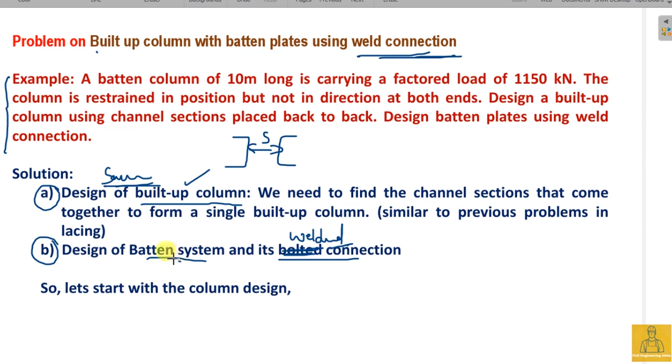This first step is going to be the same, so I am not going to repeat that. We are directly going to the batten system. Let us start. The remaining part is the same. The spacing between these two channel sections is found to be 218.4 mm. This is the minimum spacing you need to provide. We have rounded this value to 220 mm.

Now let us go with the batten system. Spacing of battens is the same as the previous case. According to clause 7.7.3, lambda of the individual portion should be less than 0.7 times lambda of the built-up section. This built-up section lambda is already found from the previous slides as 80.53.

Lambda of this portion can be written as length divided by minimum radius of gyration RYY, so it should be less than 0.7 times 80.53. So C should be less than 0.7 times 80.53 into RYY. What is RYY? It is already calculated from the code book as 28.3. On substitution, C should be less than 1595.3 mm.

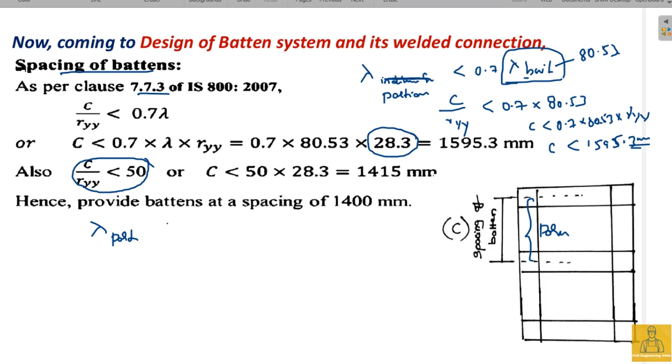We also have another condition that C by RYY, that is lambda of this portion, should be less than 50. So C should be less than 50 into RYY, which is less than 50 into 28.3. So C should be less than 1415 mm... I am taking 1400 mm as the spacing between these two battens here.

Now let us go with the size of the end battens. In the previous video we saw bolted connections there, using bolts to connect the batten plates, with an effective distance and edge distance E and E. So we wrote D equals small d plus 2E for bolts, but capital D equals small d in case of weld, since we do not have anything extra here. This total value is D. We do not have bolts, right? This is the welded connection.

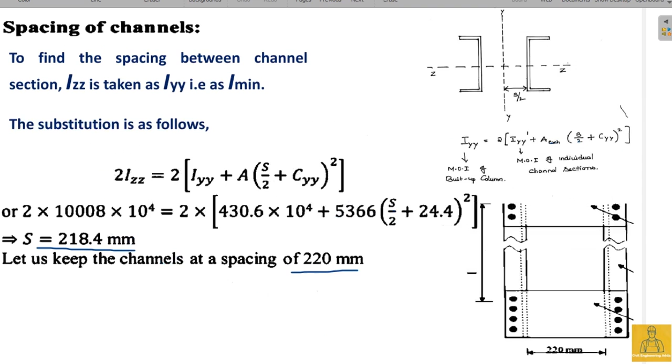So overall depth is given by S plus 2 CYY, which you can find out as 270. Required thickness of the batten is 1 by 50th of spacing. Spacing we already found from the previous case: S equals 220, the spacing between the channel sections.

Of course, you may get confused with this spacing of the battens—do not do that, be careful with that. Next, it comes to around 4.4 mm, which you can round off to 6 or 8 mm.

The length of the batten is S plus 2 times the lapping. This here is the lapping length. So what we are going to do is: length of the batten should be S plus 2 times lapping. This is S, and this is S, so S plus 2 times lapping gives you the length of the batten.

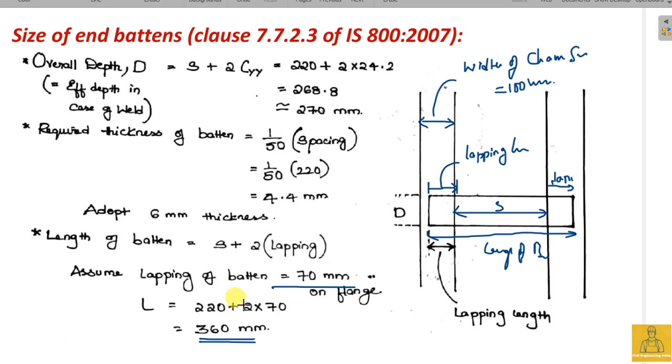Lapping can be assumed based on the width of the channel section; we have assumed it as 70. This is the width of the channel section, which equals 100 mm in this case, ISMC 350. Therefore L equals 360. So you know the depth, thickness and length—this is for end battens.

What happens for intermediate battens? You can check that the minimum lapping should be 4 times T, the thickness of the plate, that is 24 mm. Since 70 is provided, we have provided more than the minimum lapping required.

So therefore no problem with that. Okay.

Intermediate battens again: overall depth will be equal to 3/4 of S plus 2 times CYY. It is 201.6, you can round it off. So D should be greater than 2 times of B, meaning it should be more than 200. So 201.6 mm is enough, but let us take more than this. Let us round this off to 220 mm. So overall depth is safe and provide D as 220.

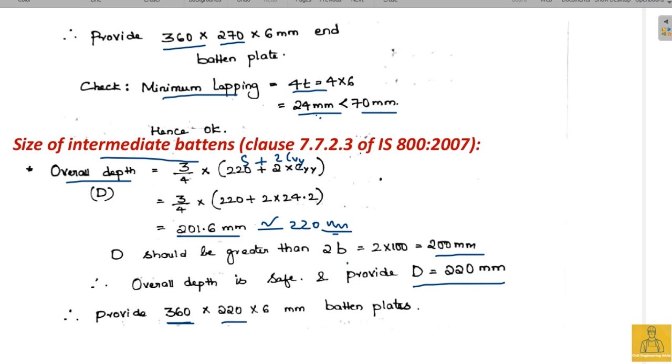So these end battens have a length of 360. This end batten has 360 length and intermediate also has 360 length, but the depth is 270 for end, and for intermediate it is 220. Thickness again is 6 mm.

Next, transverse design forces are again same. The transverse shear force is 2.5% of axial load, that is 28750. Longitudinal shear VL is going to be VC by NS. The spacing of battens C is equal to 1400 mm, which we calculated from the previous. Number of parallel planes of batten is 2.

Minimum transverse distance between the centroid of the bolt or weld group is S plus 2 times of G, which is equal to 320 in this particular case.

Longitudinal shear force is going to be this much. So if this is the batten, this is the VL shear force. Now this longitudinal shear force is giving rise to moment, and that moment due to longitudinal shear force is VC by 2N, which is 10.06 into 10 to the power of 6 Newton mm.

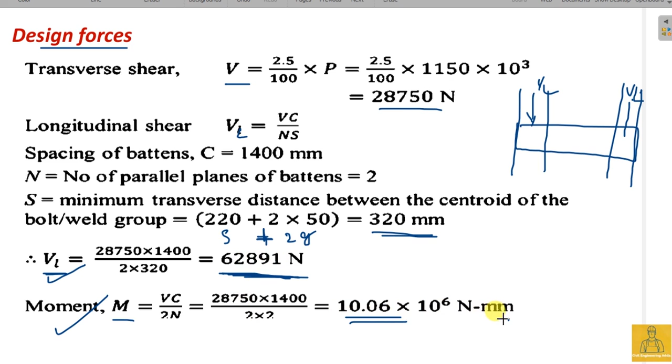Now what we are seeing is there is a shear force and there is a bending moment. Therefore there are stresses due to shear force and moment. Because of the longitudinal shear force of 62 kilonewton and moment of 10.06 into 10 to the power of 6 Newton mm, there are two stresses due to shear force and bending, and shear stress is given by shear force divided by cross sectional area of batten. So shear force divided by area of batten gives that, and bending stress is nothing but M by Z, which is 138 MPa, and you have to check whether they are within the limits or not.

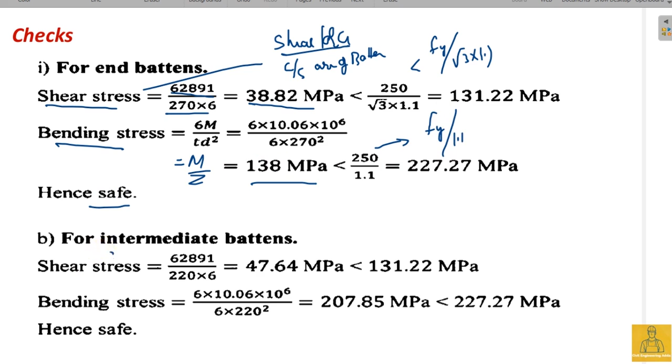The shear stress should be less than Fy by root over 3 into 1.1, factor of safety 1.1, and bending stress should be less than Fy by 1.1. It is within the limits, therefore it is safe. Similarly for intermediate battens also check that.

So now coming to the welded connection. When we are talking about the welded connection, the important thing is what should be the size of the weld and what is the throat thickness of the weld. That's it, right? So you have to find out what is the throat thickness. And remember, when you are putting this batten plate over this channel section in this way, you have to weld on all the four sides. See, 1, 2, 3, and other side, back side 4.

So now, in order to calculate what is the thickness of this weld required, minimum thickness, you just need to find out what is the moment of inertia about ZZ axis. See, this is an axis and this is an axis, this is ZZ and this is YY.

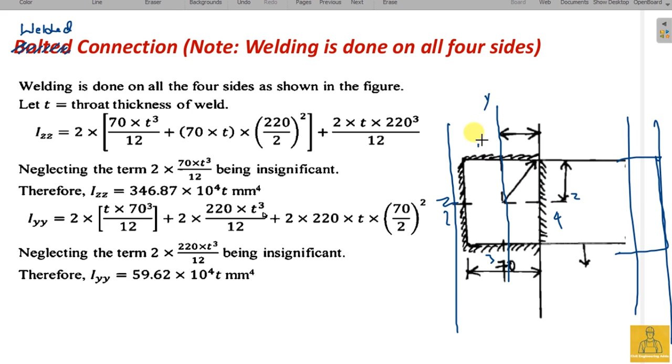So now let us come to the welded connection. When this batten is placed over the build-up section, it is to be welded on all the four sides. Let me draw a rough figure once again here. This is the column and this is how this batten is placed. You have to weld this portion and this portion and the back side also here. So when it is overlapping here, you are welding on four sides also.

Consider this case here. Let us take this, let us see what that is. So that is what I have drawn here, this figure here. These are the axes, the vertical axis and the horizontal axis that pass through the centroid of the weld, not the centroid of this channel section or batten or something—from the centroid of this weld.

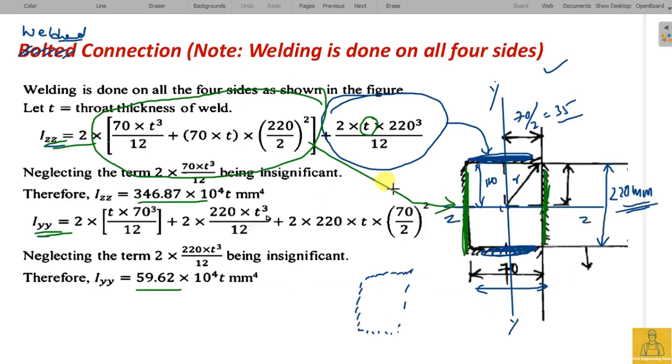And what is the R value? R is nothing but, see in this figure, from the center to the corner, this is R. So it is a right angle triangle, so you can find out that value as 115.43 mm. And you can find out what the angle theta is also here. This is the angle theta.

So what happens here is, cos theta would be 0.3.

Now direct shear stress and shear stress due to bending moment, as we calculated in the previous case according to clause 10.5.9 of IS 800 2007, is this. This is the shear force and this is the area of weld, total area of weld. What is this? This is 70 and this is 220 and this is 220 and this is 70.

So the length would be 2 times 70 plus 2 times 220, into T, the throat thickness. So that is what I wrote here. Upon calculation, direct shear stress will be in terms of T in the denominator. And similarly, shear stress due to bending can be calculated from this equation M by Z, so upon calculation, it is also going to be in terms of T.

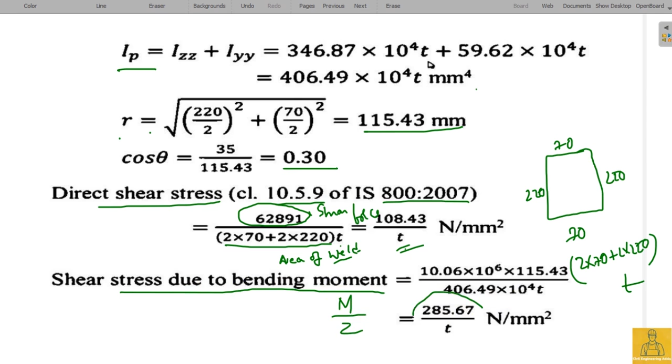So what we do is find out the net resultant force, and it comes out to something like 334.59 by T. But it is to be noted that this combined shear stress, stress due to shear and bending,

should be less than Fu by root over 3 into gamma MW, the weld's factor of safety, which is taken as 1.25 in the shop.

So it's going to be equal to 189.4. Now equate these two things: 334.59 by T should be less than 189.4. For our case, when we equate these two things, 334.59 by T equals 189.4, so T equals 334.59 by 189.4, which will be equal to 1.77.

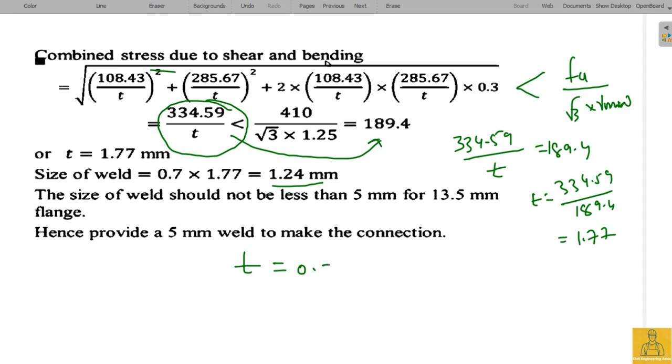And you know that the relation between T, the throat thickness, and size of the weld is: throat thickness should be equal to 0.7 times S. So since throat thickness is 1.77, which equals 0.7 S, S equals 1.77 by 0.7, you will get something like greater than 2.

Let me just find out, so it's going to be around 2.57 mm, but you know that this S cannot be less than 3 mm, so it should be greater than 3 mm.

Also, the size of the weld depends upon the thickness of the batten plate, I mean the thickness of the channel section. The channel section flange is of thickness 13.5 mm. So when the thickness of the parent metal is greater than 10 mm, it has to be greater than 5, not less than 5. If it is less than 10, you can go for 3. If it is greater than 10, you have to go for 5.

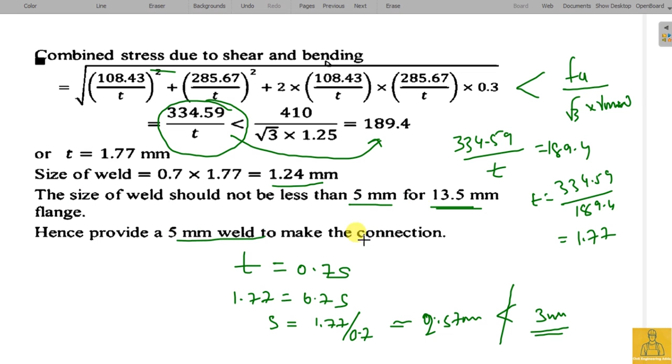Of course, we have certain limits, go through the code book, and hence provide a 5 mm weld to make the connection. So this is how the figure looks. As I told you, this figure is important, it carries marks - in some exam questions, he particularly asks you for the sketch of this figure.

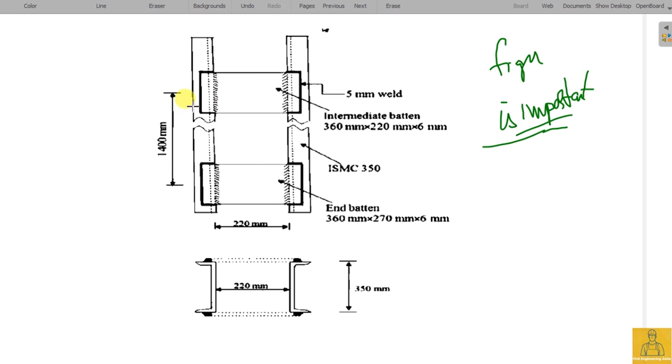So this is the weld here. This is the batten plate, and this is the weld that is done on the back side. This is the channel section, and this is the batten.

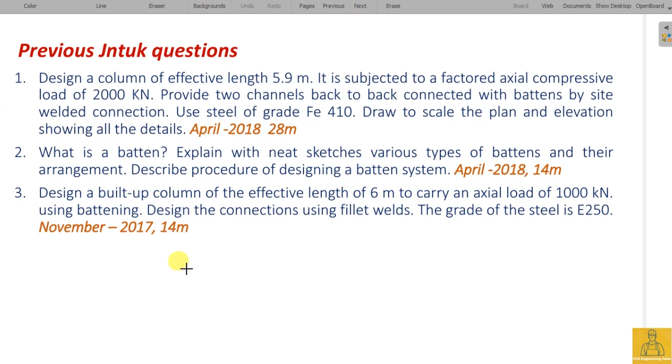So with this we have concluded the problem, and these are a few previous year questions - you can use these for practice and take it as homework. In the next video we are going to discuss the design of column splices.